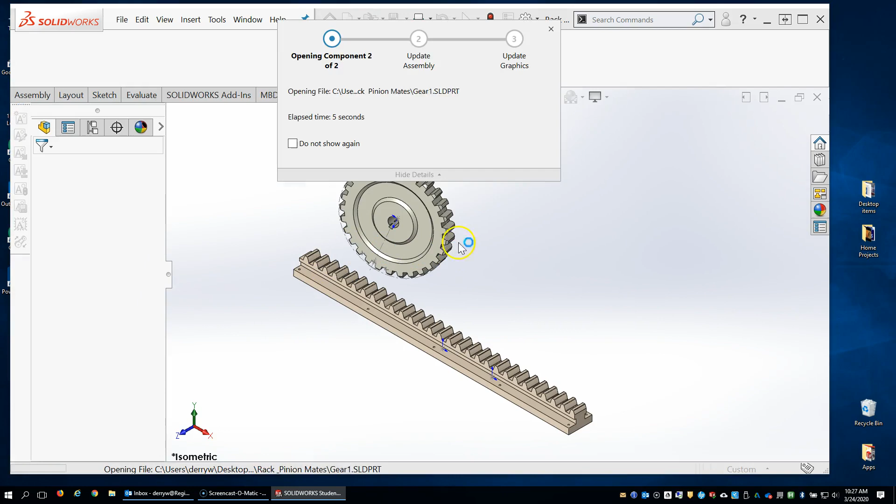So the first thing we're going to do is go to assembly and get the mate command. Next, we're going to open up our feature manager tree and select these planes. The planes are not available for those yet. If I open this part up right here and this part up here, I now have access to the mates.

The first mate we're going to do is the front plane. Notice as I hover over it, it highlights over here in my graphics window. So I want to put the front plane of the rack mated to the front plane of the gear, and it's going to line those two up for me.

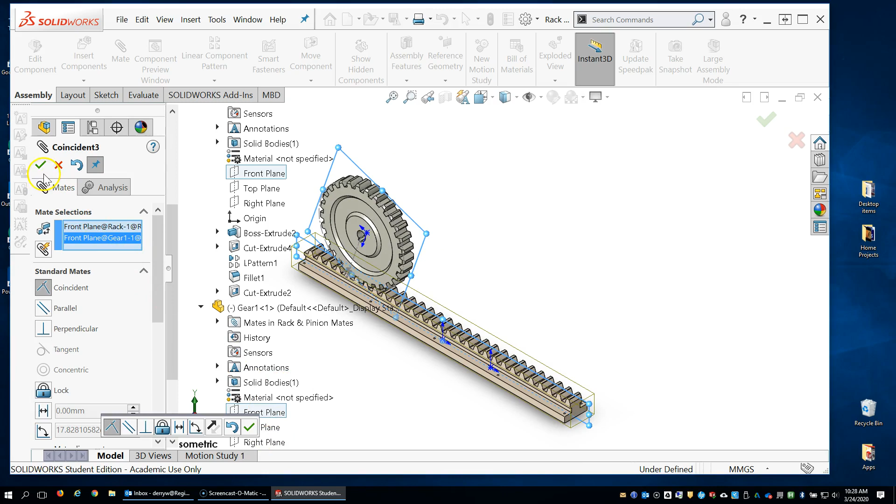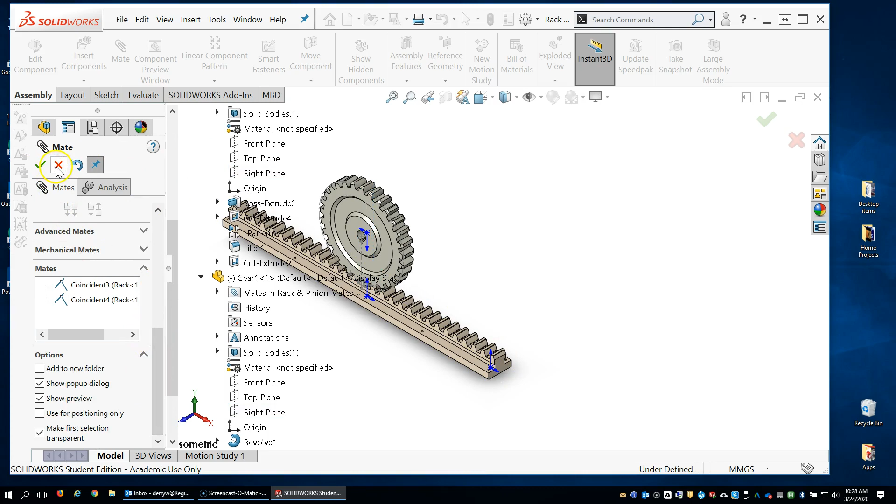Next, we're going to mate the right planes, and this is just for alignment purposes. Then we're going to suppress it. So we're going to grab the right plane here and the right plane of the rack and line those up. Hit OK, you can hit the green check there. And then I'm going to get out of mates for a moment and close these up for a second.

Come down here and see what mates we've already created. And this coincident mate right here, the author is asking us on page 11 to go ahead and suppress that mate, which means we're going to turn it off. We just did that to get things lined up.

So now we're going to get into the mechanical mates. We're going to go back to our mate command, and down here a bit we can get into mechanical mates, and the item we're looking for is the rack and pinion mate. So when we select this, click the rack pinion button. So up here we've got to select each of these.

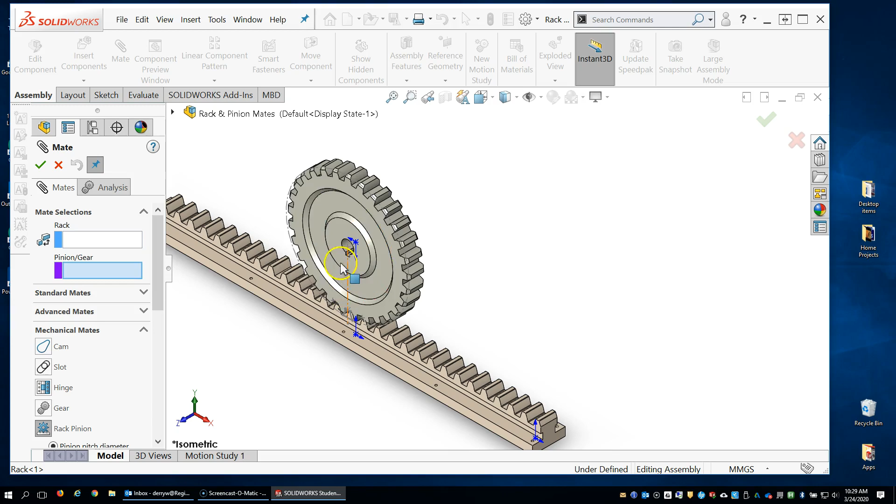So right now it's asking for the rack. This is the pinion gear. So I'm going to zoom in here. My mouse is doing funny things here. Come on. Here we go. I'm going to select this sketch here for my pinion gear, and I'm going to go back to my rack and select this bottom edge here. Go ahead and hit OK.

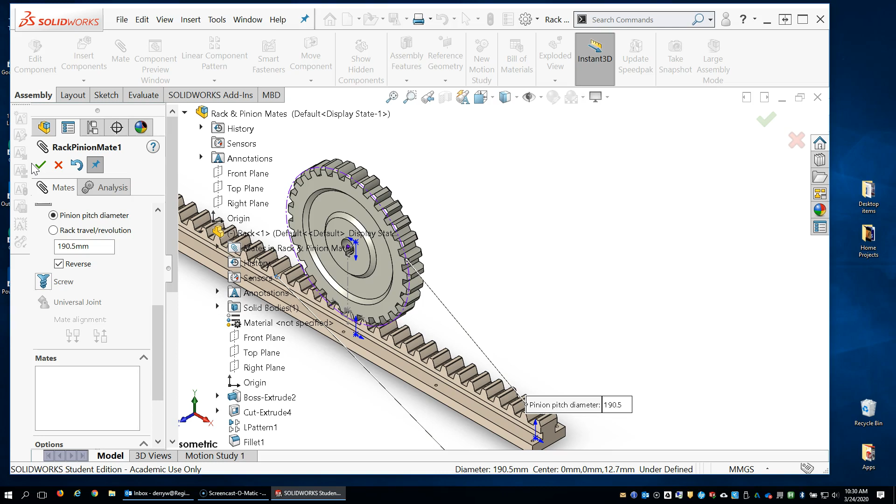Oh, before I do that, I think we need to reverse this. So I'm going to hit the reverse button as indicated as well. Hit OK, and if we drag this guy, it should work. Looks good. All right.

Next, we're going to do a little bit of a motion study. This is not on the CSWA exam, but it is kind of fun. So we're going to take a look at doing the motion study. I don't use this all that often, so if I stumble a little bit through this recording, just bear with me.

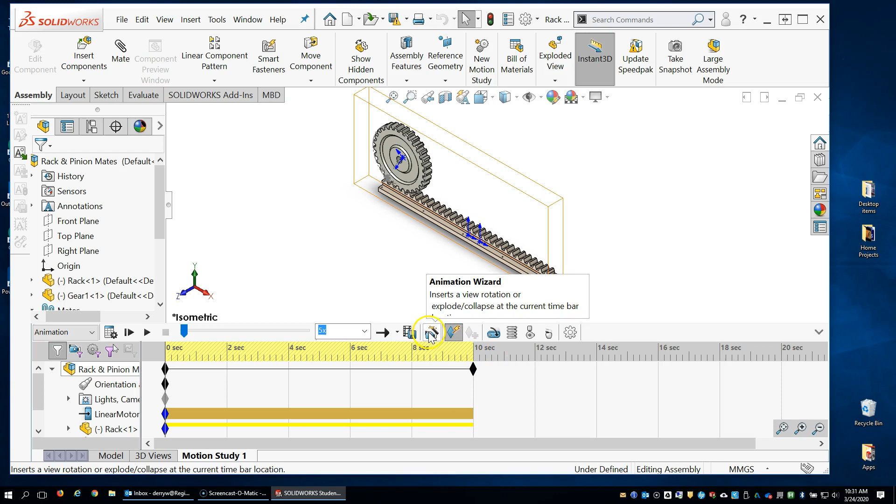Okay, so we're going to hit motion study to start. Okay, and we're going to hit our motor here for our icon for our motor. Where is that? Okay, the motor button doesn't look like a motor anymore, as indicated in the book. I click this guy, motor button, and we want to select the linear actuator under motor type.

Under motion, we are going to select the default constant speed of 50 millimeters per second. So actually the constant speed default is not 50. Bump it up to 50. Alright.

Click the playback arrow and select playback mode reciprocate. Alright, so where's the playback arrow?

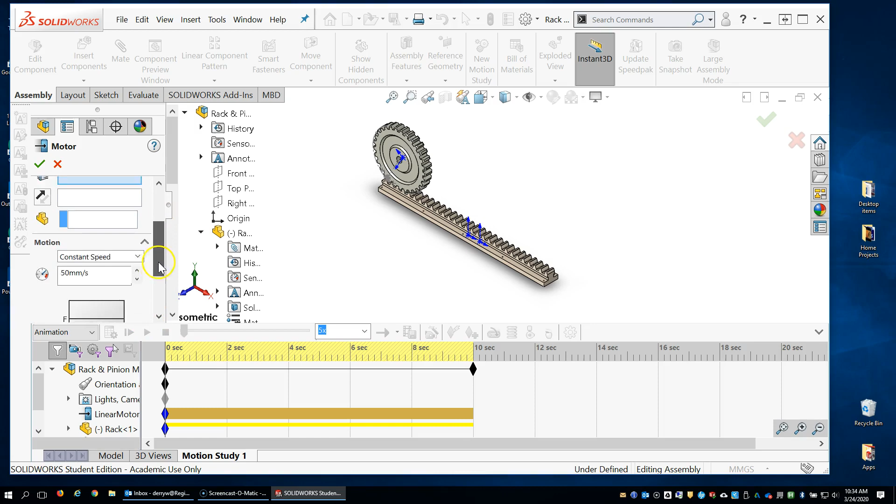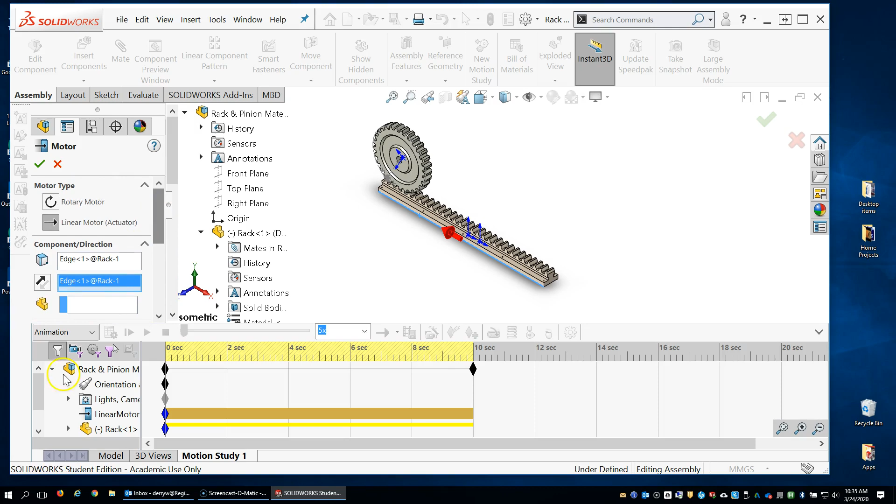I need to select my direction first, so for component direction, we're going to select this guy. Alright. Okay, we need to hit OK, select OK on that in order to get the play button to become active. Under here, playback mode is reciprocate, and then got a few of them here. Let's see what happens. There we go. Alright.

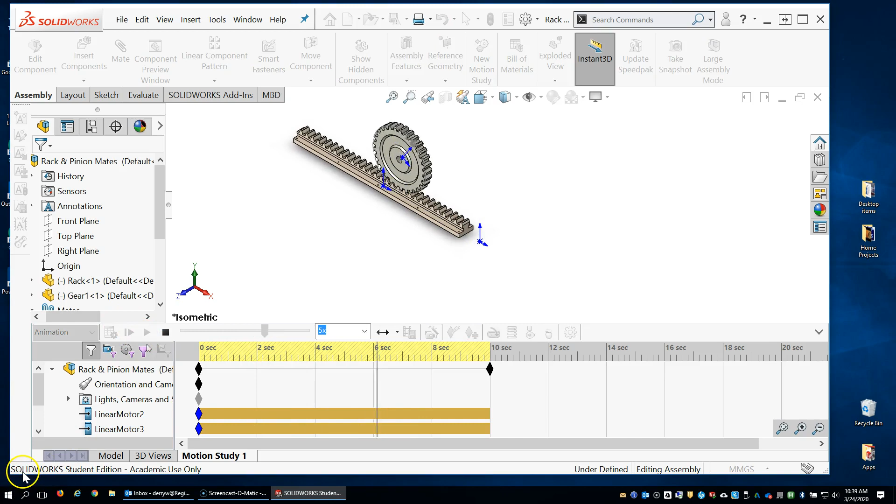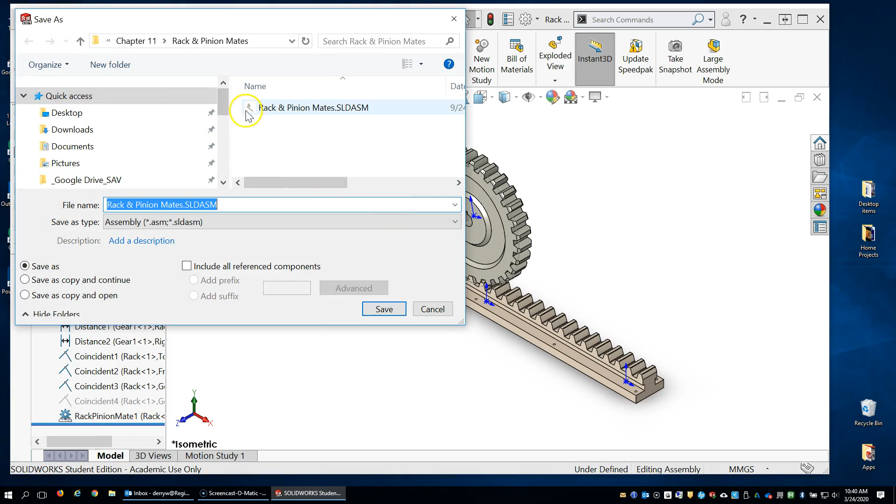When we're done, we're going to do a save as, and we're going to put our name on it instead of overwriting his. So stop that for a moment. Go to File, go to Save As. Okay, we're going to go up one level to our folder, just to point out here. So go into our Chapter 11, and I'm just going to add my name to this.